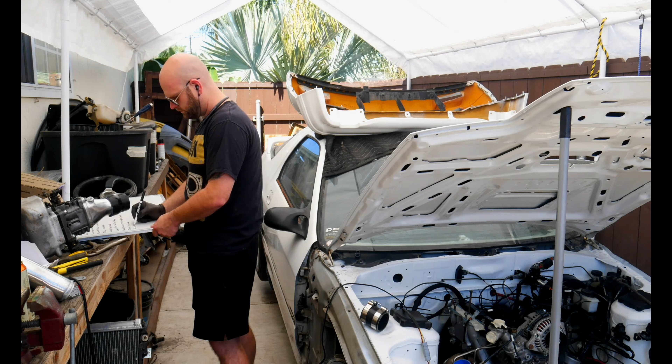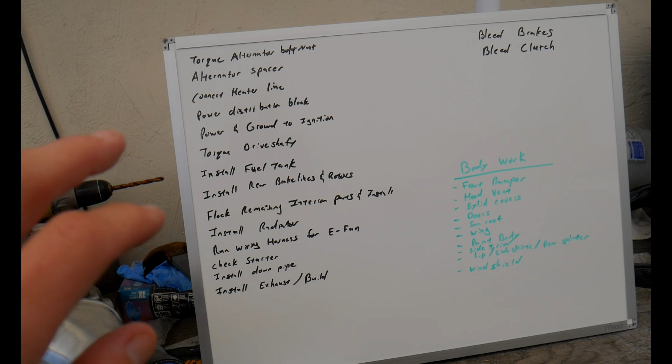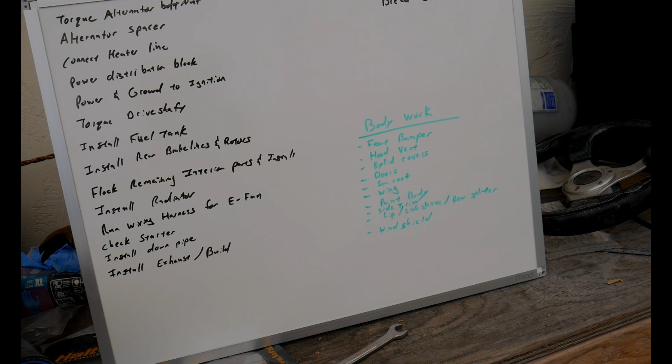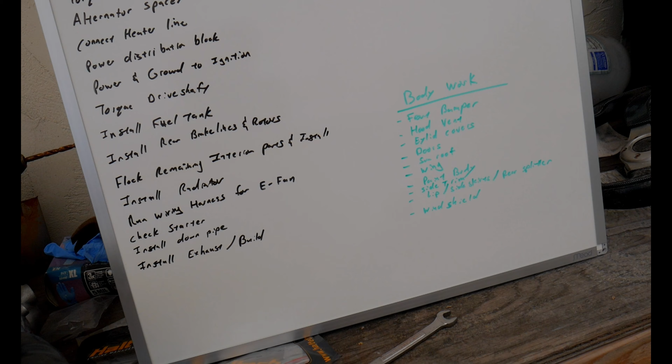Alright guys, so here's the first draft of the list. Now, everything in black is stuff I need to do to get the car running and ready so we can hopefully make it to Sevenstock. The bodywork's in green because that's all luxury stuff. The car will run and drive without the body looking super nice, and I want to take my time doing it. So these are non-priority items, but this is the stuff I want to start working through. And all I'm going to do for today's video is see how many of these I can get crossed off the list today.

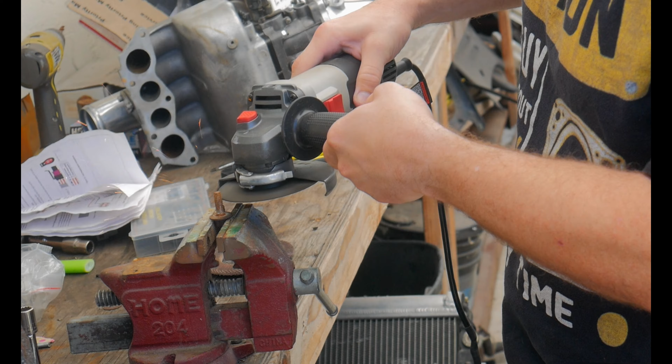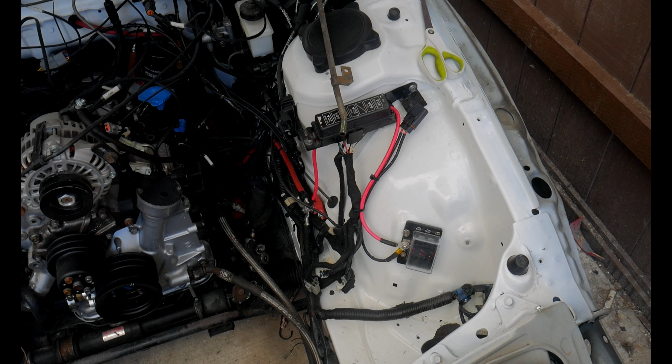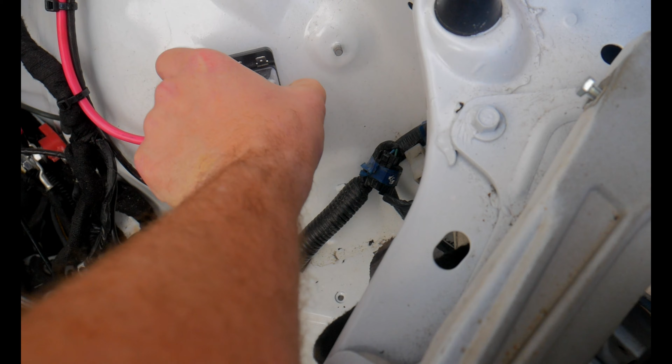Alright, now the ignition harness is connected to power via the input on this distribution block. We have power running from the main post there. It connects directly to the battery terminal, just like one long battery cable. And this power distribution block is also something that's on the list. It's a cool little product, has a covered up blade fuse holder. And so we can put in different amperage fuses in there to run the new accessories that we're putting on there, namely the electric fan for one, and the power steering pump once that's ready to go.

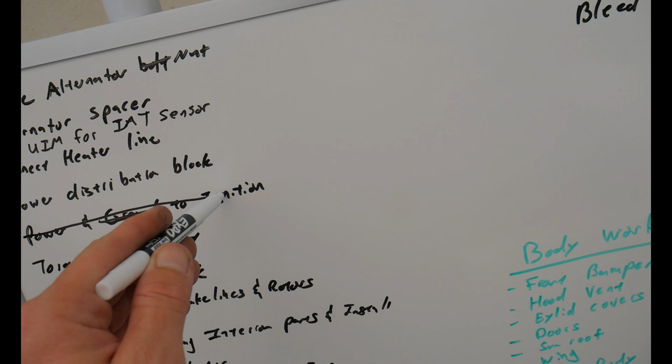Okay, so right off the bat, boom, boom. Let's see what else we can get done now.

Alright guys, I just got back from my dad's. I used this drill press to tap and thread in our intake air temperature sensor on the throttle elbow, so that's great. And we made up this little thing. This is my attempt to get our water temperature sensor into the location I want. Let me show you where that is.

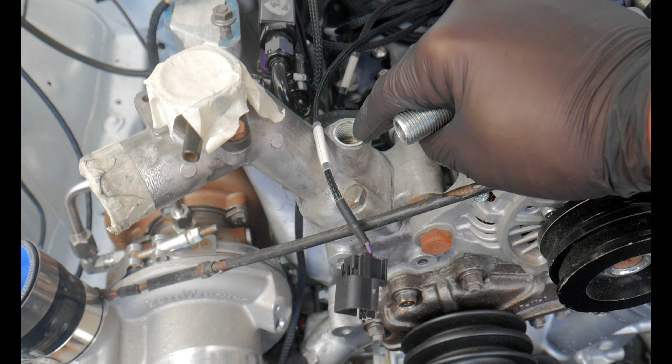So I want to use this location on the filler neck off the top of the water pump because it's right after the thermostat. So this is an M16 1.5 which threads in there, and it's actually a bolt. And I drilled in and tapped it for an M12 1.5, which is the thread fitting for this temperature sensor. So now what I'm going to do is cut this out in the length that I need so we can sink that down in there and take care of 2 more sensors for this setup.

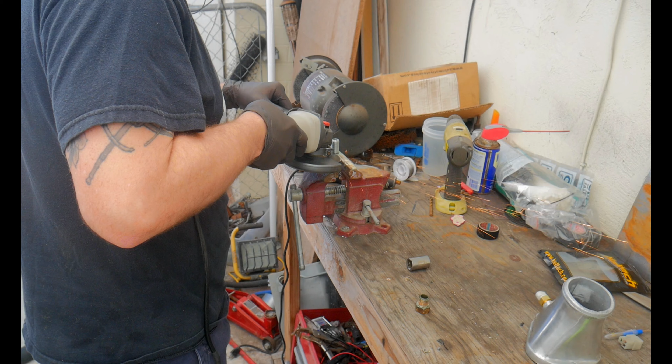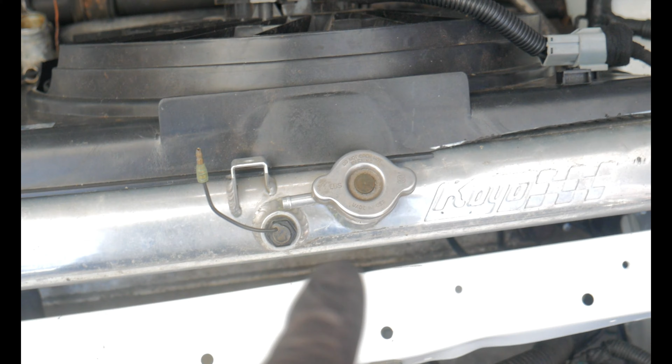Alright, so here's the fitting plumbed in. We can't check if it's going to hold until we pressurize the coolant system, so we'll just see, since it looks good for now, that it's going to work. If not, I can plug that hole and put it into the stock location here. But I want to run those in parallel, so that's the tip now.

Now what I'm going to do is get this nice and tidy down here, back here, so we can install the upper intake manifold. I'm going to get the wiring harness zip tied up looking nice, and I'm going to get the fuel fittings all tightened up now that we've got our final layout.

Well, that was super tedious. My lower back's killing me, but what that allows us to do is get the upper intake manifold on, because I needed to square away everything underneath it so that we can put it down and bolt it down and not have to keep taking it off, which means we can connect our last few sensors and start running our vacuum lines from the upper intake manifold. So that's great. Let me show you what it looks like.

It's not the prettiest because after our master tuner gets a hold of the car and tunes it, we might have to move some things around and maybe we did it wrong. So that's a consideration. But after that tuning session is done, we will wrap everything in Tesa tape and make it look nice and neat like everything else. But this is what it looks like right now.

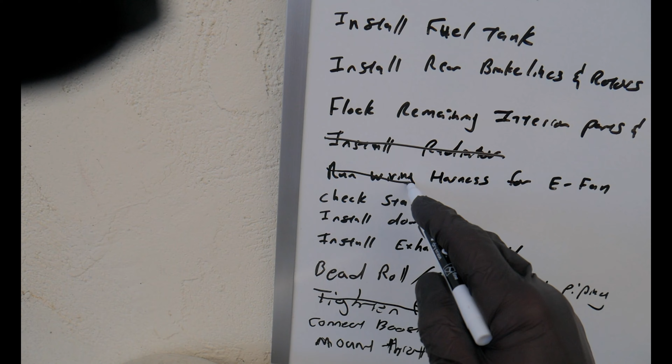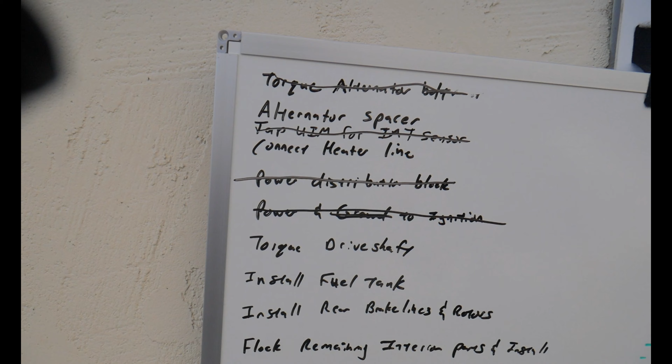Okay, one of the things I have on my to-do list is to check the starter, because we've tried to flip over the ignition and we haven't got any results. So I don't know if it's a problem with the ignition switch or with the starter itself. So I've got my multimeter hooked up and I'm just going to try and connect it to the positive lead and see if it cranks for a little bit.

Now I don't want to crank this too much, I just want to see if it will engage at all. If it does, we can wire a push button start or something like that. So I'm going to get underneath the car down here. I've got my multimeter hung down there. I've got the positive end connected, and I'm just going to see what happens.

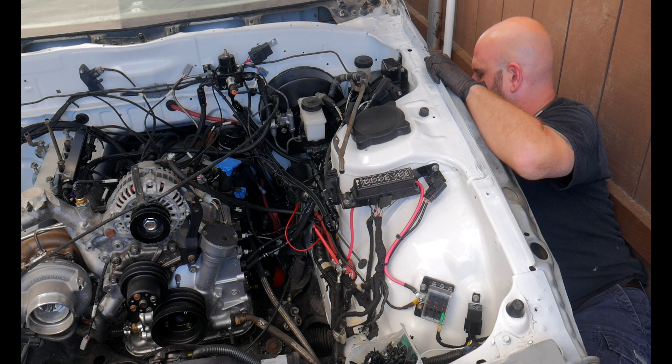Okay, so I can get it to make some noise. The wires get really hot because this is not the correct gauge, and I think I'm just missing one connection, so got to add that to the list.

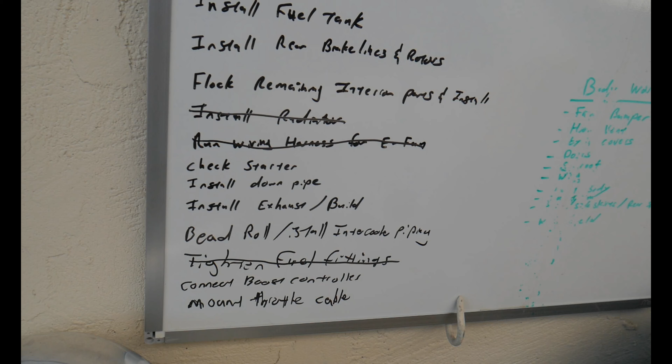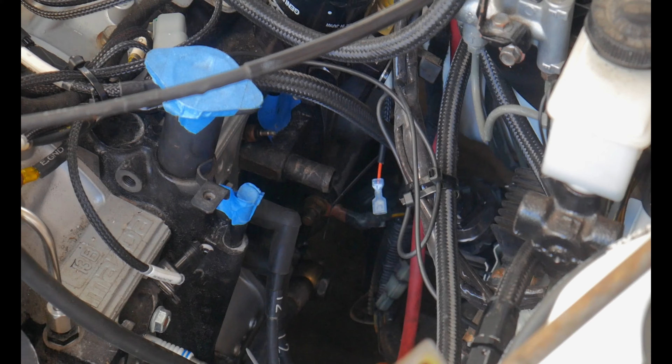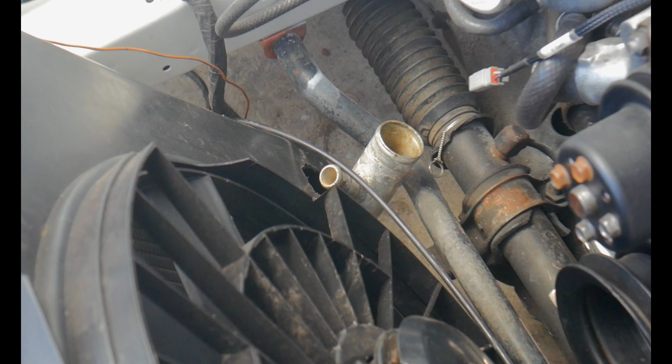Now, one of the other things I have going on is that we are not running a heater core yet. So there's a heater line output from the rear iron here that we need to route somewhere. And we're just going to plumb it down underneath and into the heater line input right down here. So I'm going to go ahead and connect that now and knock one more thing off the list.

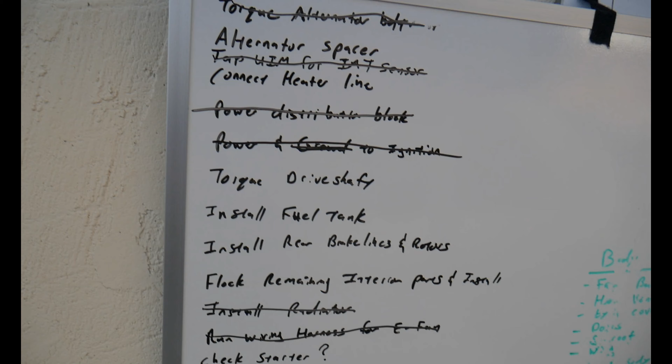Okay, so it's probably been about an hour since I put that heater hose on, and what I was trying to do was hook up the whole radiator, bottom feed, top feed. And if you remember, if you've watched all the videos long ago, we had to modify an FD kit for this TurboSource Borg Warner setup, and we have this crazy curly Q for the water feed line, and I cannot manage to get the bottom radiator hose on.

And I took the clamp off, and now I can't undo the fitting because I was like, okay, screw this, I'm just going to get this little feed line or drain line remade because this is not working. And now I can't even get that off, so I'm hoping to avoid pulling the whole turbo off. But this is just a good learning point, because as you're getting those final things dialed in, you find all these little nooks and crannies.

Like, this engine bay is getting much more crowded really quickly. And man, I'm going to show it to you real quick, but I'm going to have to figure out something for this. But I'm glad we're doing it now, and this is part of the process. So take a look.

So right here's the curly Q I'm talking about. And this fitting comes from behind here, comes down, and loops up. And it's made for an FD water pump. So the plan was to pull off this back portion, loop this heater hose around and feed it in, but I cannot get anything in here to tighten this down. So I'm going to reach out to TurboSource, see what they can do, but I can't get any tools in here to loosen this and get this out.

As I said, man, if I could just cut this line and have somebody roll a little bead on it, I could probably get it to where this line just goes down and stays away from this hose, but I can't even get anything in there right now. So that's what I'm struggling with at the moment. I might move on to something else or just keep working on it, so we'll see.

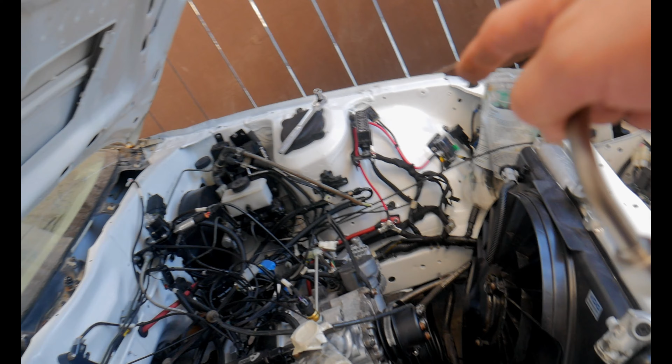Okay guys, I just took off the fitting. I had to take off the turbo from the manifold to get it loose. I had to remove the alternator, which is hanging over there, which is fine because I have to do some work on the alternator for this checklist. But anyway, this is the piece right here. So I've got to get this cut off and modified because this is not going to work with the setup the way it is.

Let's be positive. I was going to say one step forward, two steps back, but let's just say we take two steps forward and one step back, and we just have to get this taken care of, and then we'll have a great solid build once everything's put back together. So while this is off like this, I'm going to go ahead and take care of the alternator. So how about that?

Alright guys, so even though it's a little bit of a frustrating end, overall a very productive day. Let's take a final look at our list here. It's a lot of good things crossed off. So again, this is all in preparation for firing up this engine and getting it ready to go for 7Stock.